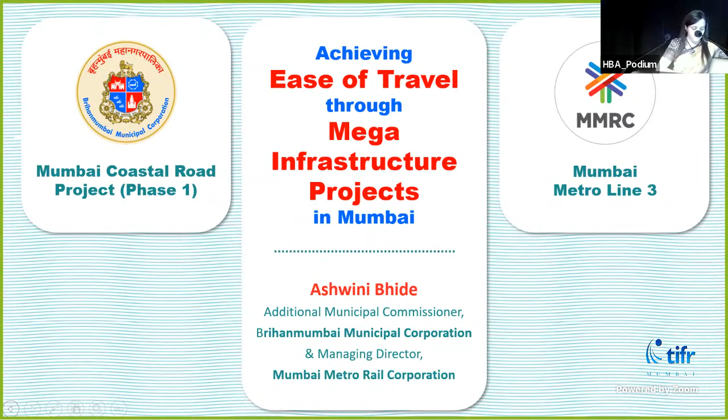I would start with Coastal Road and then give updates on Mumbai Metro Line 3. So this is the overall outline for today's presentation for Coastal Road: where exactly it is, why we need it, what its features are, how execution is being done, and when it's going to complete, because everybody is worried about that. When such huge mega projects are there, people think whether government has the capacity to really implement them and see them through till the end.

This whole project is called the Mumbai Coastal Road Project, but it is divided into two parts: the south phase, being implemented by Mumbai Municipal Corporation, and the north phase, being implemented by MSRDC, the Maharashtra State Road Development Corporation. I'll mainly talk about what exactly is happening here.

This is from the Princess Street flyover up to the southern end of Bandra Worli Sea Link. This is the overall scope of Coastal Road. It starts on Marine Drive at the Princess Street flyover, goes beneath Girgaon Chowpatty through a tunnel, comes out, then from Amarsons garden it moves like this. I'll explain how this is being built.

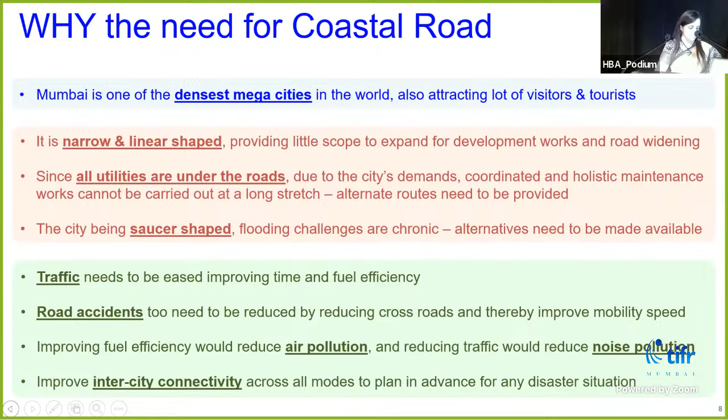So Coastal Road is a completely new road, not an expansion of the existing road network. Even elevated roads take the same right of way, so you don't find much difference in achieving additional connectivity, whereas the coastal road goes completely outside the city and still connects to important or critical locations in the city. That is the importance of coastal road.

What exactly is coastal road going to achieve? If you look at only this line, this is a 10-kilometer long coastal road. Not much in terms of length, but it is going to save almost 70% of your commuting time, because today reaching from Marine Drive to Worli takes almost 45 to 50 minutes.

On this road, you can travel in 8 to 10 minutes, achieving an average speed of 80 km per hour, compared to the abysmal current speed of 21 kilometers per hour. It will relieve traffic on the existing road network substantially, and there would be dedicated bus lanes available.

If equally efficient public transport is also available there, there will be substantial savings in fuel consumption, and of course in CO2 release per annum. Improved connectivity between southern and northern parts of Mumbai will provide better accessibility.

Today, South Mumbai has all the heritage areas and so many other centers where people would love to come, but they can't because of the travel time or commuting time it takes. So the coastal road would ease that commuting.

It will also have additional features, because since we are building this road on reclaimed land, that reclaimed land gives us an opportunity to have a garden worth 70 hectares wide. It is basically like having 13 Wankhede stadiums in the enclosed vicinity.

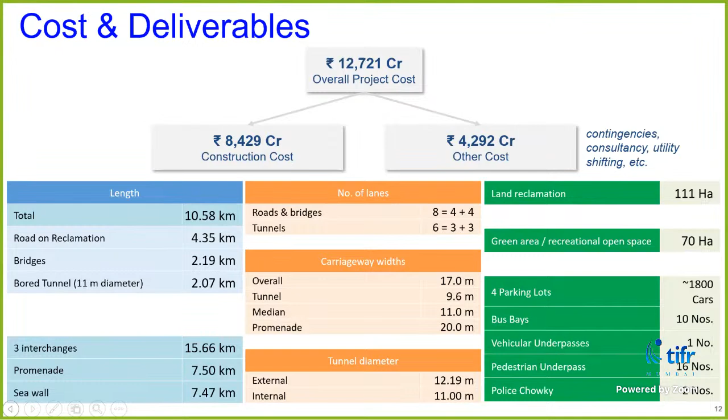This will be a road of 4 into 4 lanes, so an 8-lane road. In the tunnels, there will be six lanes. Overall carriageway width is 17 meters, which is very wide, with the tunnel being 9.6 meters wide. The median is also 11 meters, so all these areas would provide us spaces for more green areas.

And there would be a promenade of 20 meters. Apart from the promenade we have today at Marine Drive and some promenade at Worli, this is going to give us a continuous promenade of 8 kilometers from Priyadarshini Park up to Bandra Worli Sea Link.

Apart from what we have, the existing Worli promenade will also remain as it is, and we have Marine Drive intact. In addition, this will be a 20-meter wide promenade, giving us a lot of opportunities to create open spaces for people, with green features, cycle tracks, and so many other facilities.

So it gives us 70 hectares of such virgin land, which we can plan the way we want for giving additional green space to the city. The external tunnel diameter is 12.19 meters, and the internal is 11 meters.

For this project, we had to reclaim almost 111 hectares of land. Out of that, 40 hectares would be used purely for the road. The remaining 70 hectares had to be reclaimed because you can't have an exact parallel road to the existing road due to the contours.

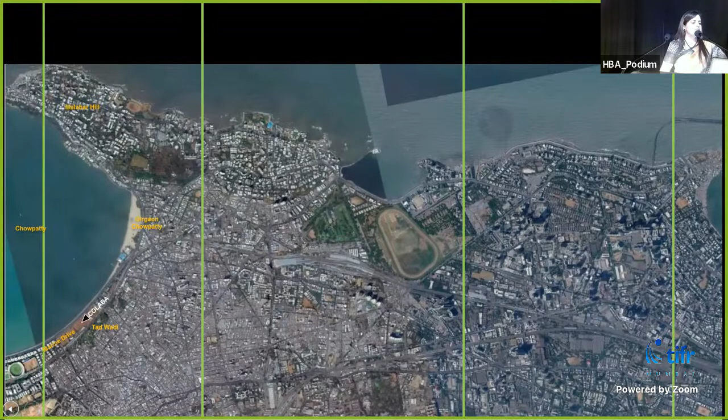Starting from the south side, from Priyadarshini Park - this is package 4, we call it. It is 4.5 kilometers long, from Princess Street flyover to Priyadarshini Park. It has a tunnel, some cut and cover portion, because when the TBM comes out, we have to slowly bring it on ground. For that, some portion becomes cut and cover, and then there is a ramp.

And then the tunnel has ground access. The second package is Priyadarshini Park to Baroda Palace, about 3.80 kilometers long. This is a complete road on reclamation, with bridges and interchanges. Package 2 is 2.71 kilometers long, from Baroda Palace to the Worli end of Bandra Worli Sea Link. This is also a full road on reclamation, with bridges.

These packages are being implemented by different agencies. 2 packages are with L&T, assisted by 2 project management consultants - Yooshin Engineering for package 4, Louis Berger for package 1. Package 2 is with HCC, HDC JV, Hindustan Construction Company, and the project management consultants are Egis India and their partners from UK. On top of it, we have a general consultant, AECOM Asia, because it's a very complex project.

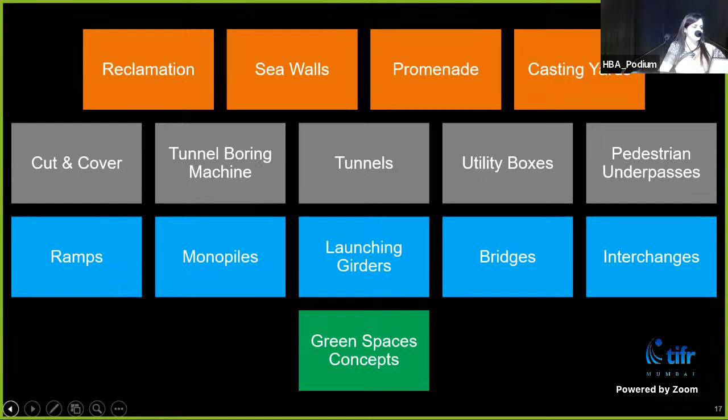So these are various features of this project, and how the future green spaces are going to look like. That is just a thematic presentation, but what we are going to make will be quite closer to that. So this is just a pictorial presentation - there will be a few slides on presentations only.

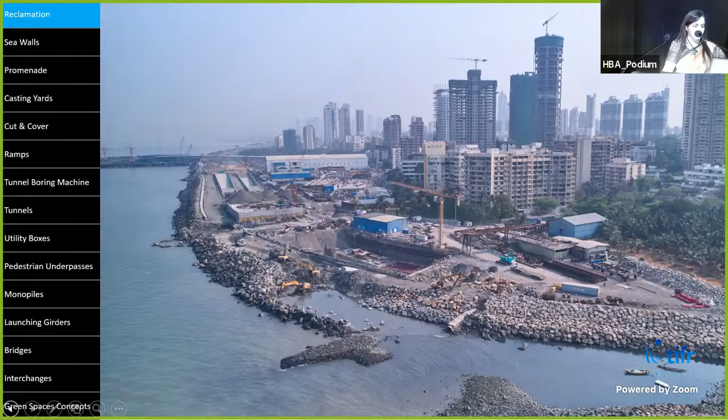This is near Nepean Sea Road. Here you can see this is behind, I think this is also Nepean Sea Road. This is towards Bandra Worli sea link, parallel to our Worli sea face.

So this is how the sea wall is constructed, because this is a very important feature, as I said. This protects not only the coastal road but the entire coastline. And it is done in such a way that the marine life is not only saved, but it can thrive because of the material being used.

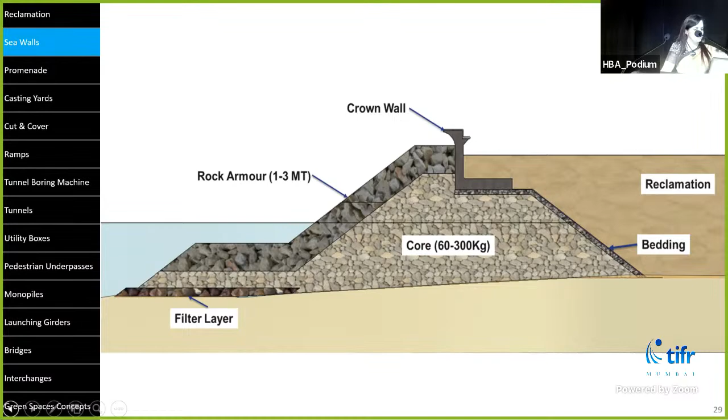So we have these different layers of different types of materials: the filter layer, then the core, then rock armor. This armor rock is very important. It is produced from certain quarries, needs to be shaped in a particular way, and is transported here, then laid in a particular way, and on top of it we have the crown wall. So this is how the sea wall is constructed for the entire coastline.

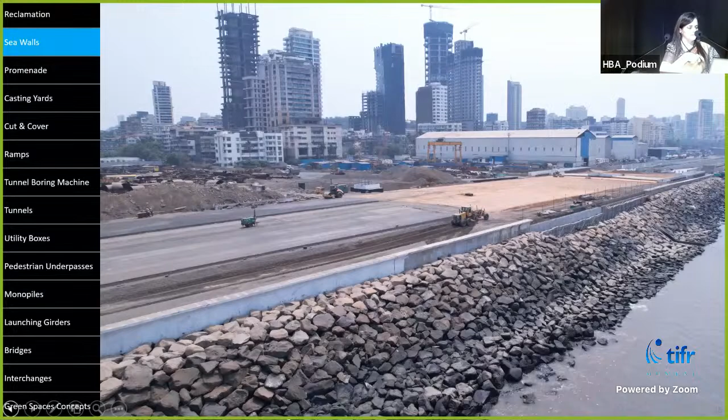So after the sea wall, there will be the promenade, and beyond that there will be the road or interchange portion. This is how the sea wall is constructed, and here you can see the crown wall.

Now this is on Marine Drive. Marine Drive has about a 1 kilometer stretch where we come out of the tunnel and the actual access road to the tunnel starts. There we have to use the existing promenade of Marine Drive that gets converted into road. Beyond that, the new promenade for 1 kilometer is being constructed.

It is like on stilts, but for people there won't be much difference. It will be at the same level, constructed in the same manner, and the continuity will be maintained.

These are casting yards. Now the advantage of this project versus what we faced in Metro is, in Metro there was so much requirement of land but we were not able to get it. But an advantage we had for this project is that we reclaimed so much land that some of it could be used for construction activity.

So whatever casting yards and RMC plants were required for this project - in Metro Line 3 they were all outside the city, and from there we had to transport everything and plan the sequence to fit into our timeline. But here that advantage was there.

So on much of this reclaimed land, we have either casting yards or concrete plants. The segments are needed for lining of the tunnel, and some of these girders are required for interchange bridges. So everything was cast, constructed and produced here.

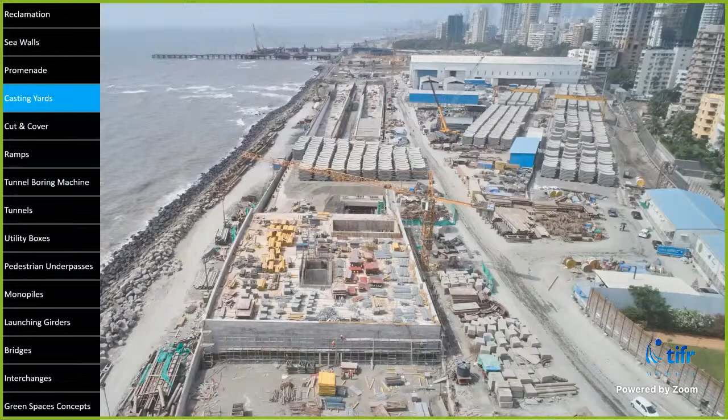So this is how we work in the casting yards. There are different molds, and the advantage is because it is within your reach, inspection could happen on time. The concrete is also prepared and made there, so the consistency of concrete could be easily monitored. All this was possible because we had land in the vicinity due to this reclamation. So this is again the casting yard.

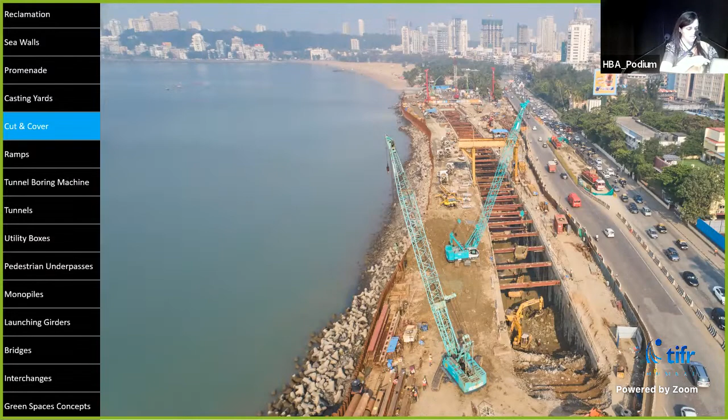This is the launching shaft site from where the machine was. In fact, in this project, we launched the machine from Priyadarshini Park side, and then it was brought here - that was the whole idea. Once it comes here, this was a retrieval shaft. Take out the machine, go back to Priyadarshini Park, and then again start tunneling for the other tunnel.

But instead, our contractors, consultants, and team used a different methodology. They used a turntable - this is a huge machine, as I told you. They turned the machine here and started tunneling from this side, so we didn't have to take out the machine. Now the machine will come up only at Priyadarshini Park, which is just 100 meters away now, so maybe in another month's time we'll finish our tunneling.

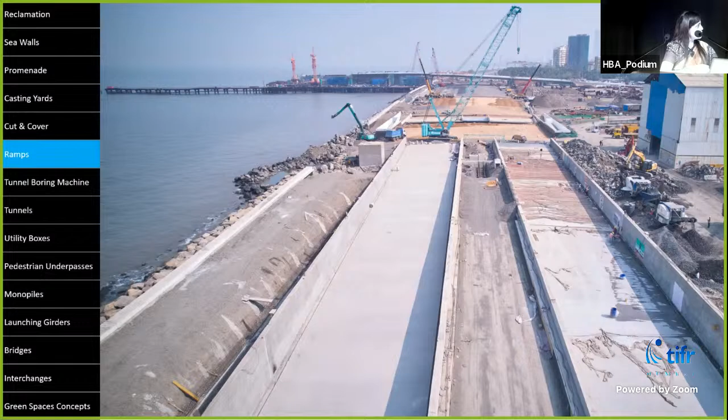So this is how the working happens. This is a cut and cover section - this is the actual completed cut and cover section. You can see, towards Priyadarshini Park side, the one tunnel which is completed. These are the ramps, you can see the slope here, so slowly the vehicle starts coming up and merges with the normal level of the road.

So this is about tunneling. This is the tunnel boring machine. In Metro 3, we had 17 tunnel boring machines, but of smaller size - the diameter was 5.6 meters. Here it is more than 12 meters. And this is the cutter head, which was lowered in the Priyadarshini Park launch shaft.

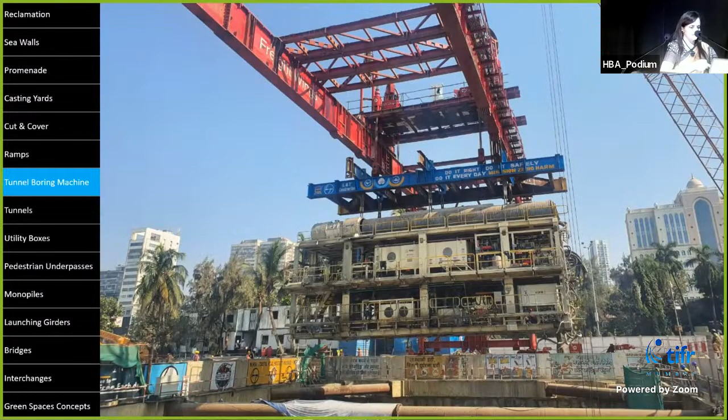So you can see the size and magnitude of this project from these pictures. This is the machine, titled as Mavla. So this is the whole machine - it has already gone inside.

These are the front shields, and then we have many gantries behind which feed the machine with concrete segments, take out the muck, give ventilation, and supply many other things required for construction. This was our breakthrough when we got the machine out for the first tunnel, and then it was shifted here and the second tunnel was started.

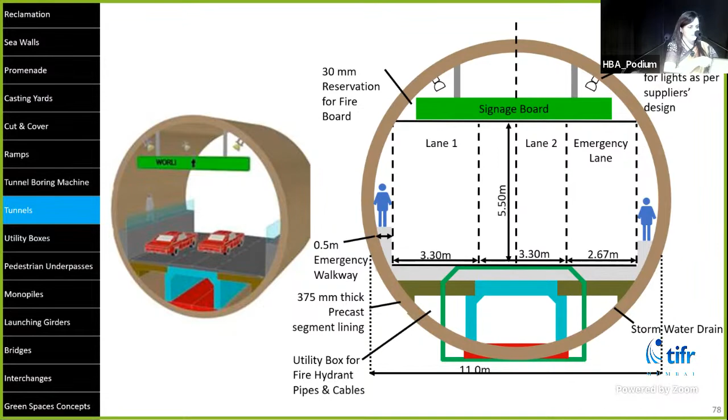So this is a completed tunnel. This is the utility box.

Then we also have to do these pedestrian underpasses - that construction is going on. Once they are completed, that area will also be filled and the road will be constructed on top of it.

Then there are many stormwater drain boxes also, because you have to cross everything. Right now they are terminating at today's coastline, but we are extending the coastline - we have filled the area ahead of that. So those stormwater drains need to be taken out towards the sea beneath the road, and that needs to be planned right now because later on we won't get a chance to do that.

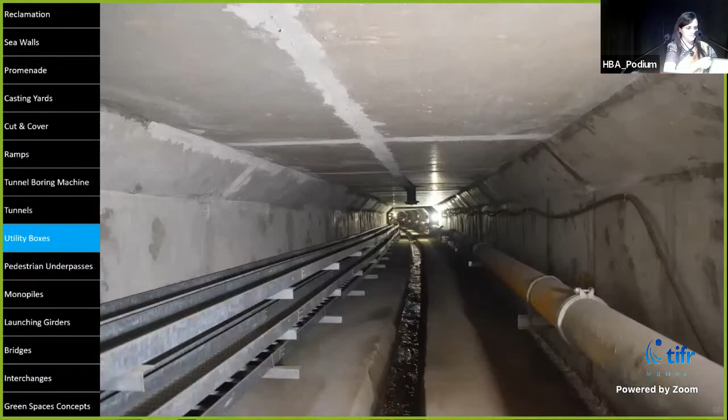So here you can see for Haji Ali, we need a pedestrian underpass because there's going to be a level difference in this area. This underpass will take people from the main road to Haji Ali Dargah. Apart from the road, there will be a lot of green spaces here, so people can walk from here up to Mahalakshmi Temple and access it from the back. Today that access is quite complicated from the other side.

So these are the RCD machines for monopile construction. This is how the monopiles are done.

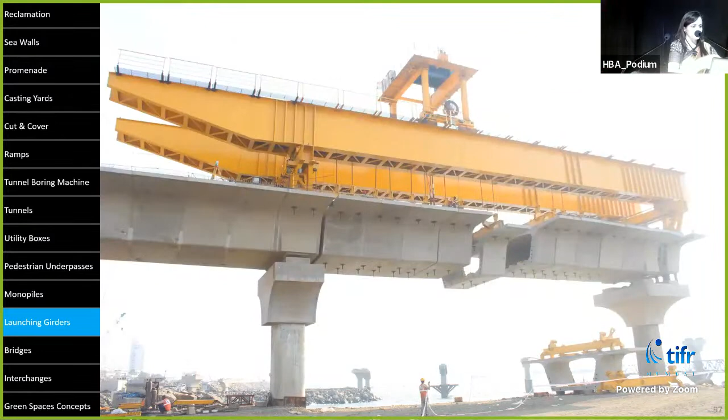This is how the bridge portion is constructed. We have these pillars on monopiles, and these are all temporary structures. This launching gantry brings segments from here, but some of the spans will be constructed in situ, which requires a lot of support. So temporary structures are erected, and with the help of that, the bridge is constructed.

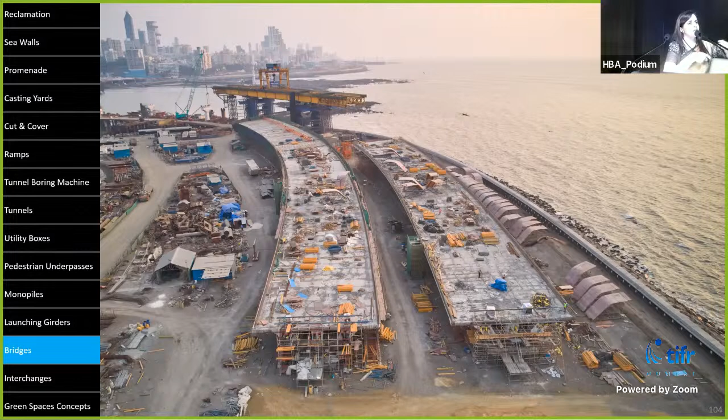Now this is the interchange I had shown, with different arms. At Haji Ali, we have an 8-arm interchange, so you can go in different directions, similar to what you see in foreign countries. These different arms are under construction. At Worli, there is a 6-arm interchange, and at Amarsons Garden, there is a 4-arm interchange. So people can go in multiple directions and even take a reverse direction.

This is Love Grove Nala at Worli, opposite Atria Mall. Here we have to give space because some BMC sanitation activity happens here. There's a treatment plant, and water flows from here, so we have to give adequate space while maintaining continuity.

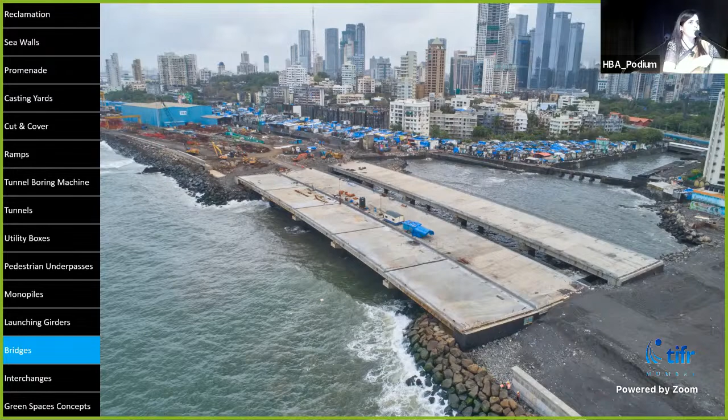So we have these bridges, but initially the promenade was not planned here. The promenade was getting cut, so people had to walk all the way to Worli to reach it. Later, the promenade was added here and constructed, and now it is complete. So there are two right of ways for the road, and this is the promenade part where pedestrians can access and go. This is how it looks, and now this portion is clear.

Water flow is intact. When we were constructing it last monsoon and before that, some filling was required to be done here, but during monsoon we had to remove it temporarily to allow the water flow to continue, and post-monsoon we could complete these sections.

So this is towards Bandra Worli Sea Link, because this is the main bridge. It is in the open sea, and that's why it has certain specific requirements. There are design challenges, and this is under construction right now.

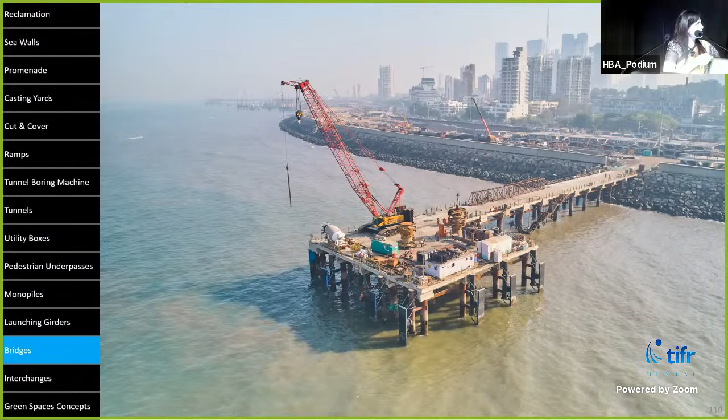This is part of the interchange at Worli. This is one arm, and then it will go circular, taking a circular turn here. So this is how that interchange is shaping up.

Here the work is happening because finally they have to connect up to the bridge portion. Right now one foundation is done, but then this machine will move further and the next foundations will be made. So key interchanges are also a very important feature of this project.

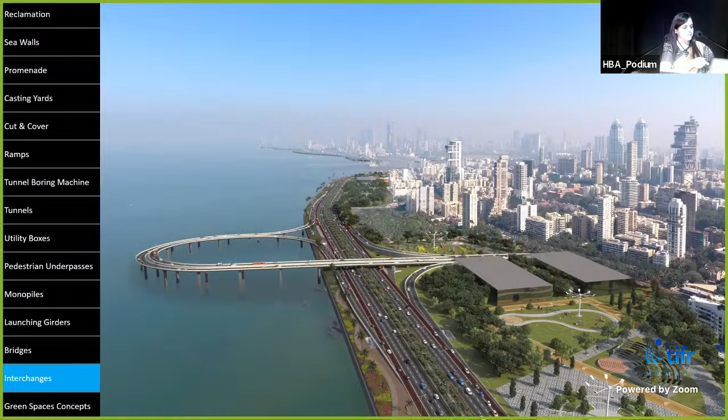So it would ultimately look like this. This is towards Worli, this is Amarsons, and this is Haji Ali, and that is what is under construction right now.

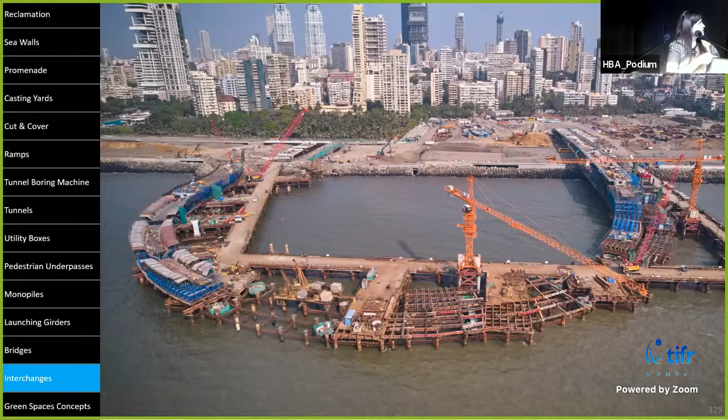So this is Haji Ali. You can see the main bridge, and the whole interchange is shaping up here. You can see how this part of the interchange is being constructed, and we can very well see all these interchange arms coming up and progressing daily if you travel near Haji Ali or Worli.

So this is the temporary staging, because the casting is happening in situ. Some of them are precast segments which are brought and installed, but just to expedite the whole work, the contractor has adopted a mixture of methodology—some in situ castings and some precast structures.

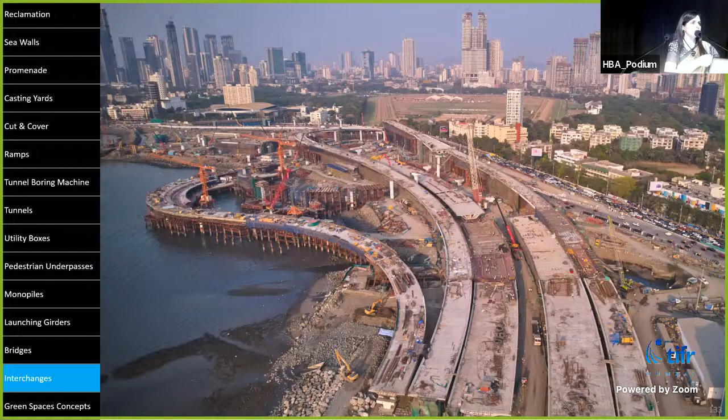So here you can see how the interchange is coming up. This also gives you a fair idea of how it is coming up.

Basically this interchange will let people come down and go in different directions. They can go back and take the existing adjacent route. But those who want to go ahead, this bridge will be there, giving connectivity so they can continue traveling on the coastal road.

Now, this is a huge construction activity. How did we do that? What kind of rigor did we have to follow? There were many rigorous studies and efforts. Multiple studies were taken up before the project went from drawing board to actual ground - some before the project started, some while work was ongoing. Then there were multiple approvals and no-objections required from different authorities.

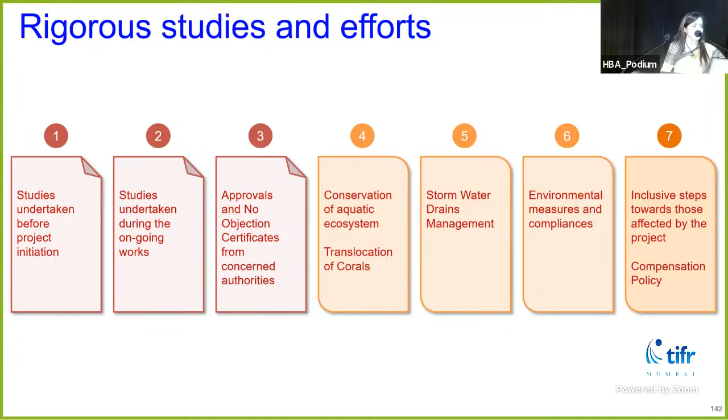These were the different studies we carried out: inception report, feasibility report, then detailed project report containing almost 11 chapters. We also had to study extreme waves, extreme water levels, storm surge, tsunami height, and coastal morphology for the coastal road project, conducted by the National Institute of Oceanography, Goa.

Sometimes people feel that while we are doing this project, maybe it isn't being done in a safe way, and wonder whether it will create additional problems for the city. But no, all these projects are planned in a very meticulous way. A lot of discipline is followed before we actually start executing these projects, which is why various studies are undertaken. Even during construction, if a problem is faced or anticipated, those studies are undertaken and the issue is logically concluded before we move ahead.

Studies were also undertaken during ongoing works - there was a study by the Central Marine Fisheries Research Institute, which was basically a baseline study of the impact of the coastal road on fisheries, fishermen, and their livelihood. NIO also undertook a Marine Biodiversity Conservation Plan for the Mumbai Coastal Road, covering various impacts of the coastal road on waves, water levels, etc.

In the initial study, we had not found any coral colonies in the vicinity. But when we actually started working, we found them. So we had to undertake a coral translocation report. NIO was involved and gave us a plan, and in a very systematic way, the corals were translocated to another place where they are thriving now. But it had to be done very systematically.

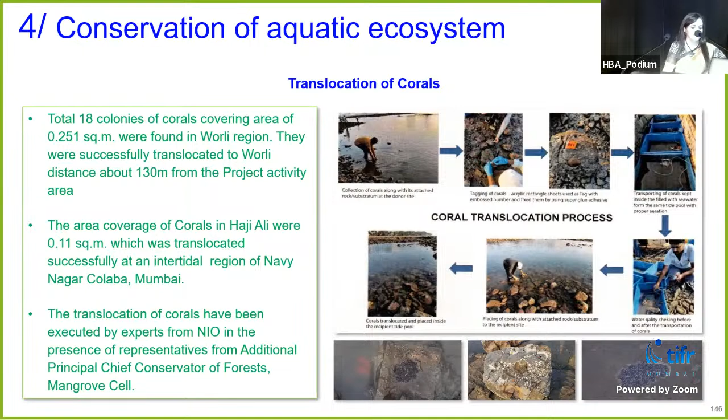Then stormwater drains, because that was another worry. We used to get a lot of complaints that because of the coastal road, flooding has occurred — you could see newspaper headlines also. But it's not like that, because everything has been studied. Whatever water channels today are throwing water out of the city, those water channels are not only kept intact, but actually their capacity is augmented to suit the BRIMSTOWAD report or whatever BMC is following as per future requirement.

So originally there were 7 box drains, 3 pipe drains, 11 open channels. All these existing SWD outlets were clogged in fact, because of tetrapods at some locations and other facilities. But now, when we had an opportunity to reconstruct them, we have done it in such a way that they are not clogged, but actually could be used in a more efficient way. So all SWD outlets are now opened clearly. These outlets are extended independently beneath the road up to the sea along the alignment and through box culverts, most places, and their capacity is augmented, with well-designed hydraulically operated sluice gates.

In fact, today only we commissioned 1 sluice gate in package 1. So these things are happening, and this is how it was planned, and it is exactly implemented the way it has been planned. Then there were some other environmental issues.

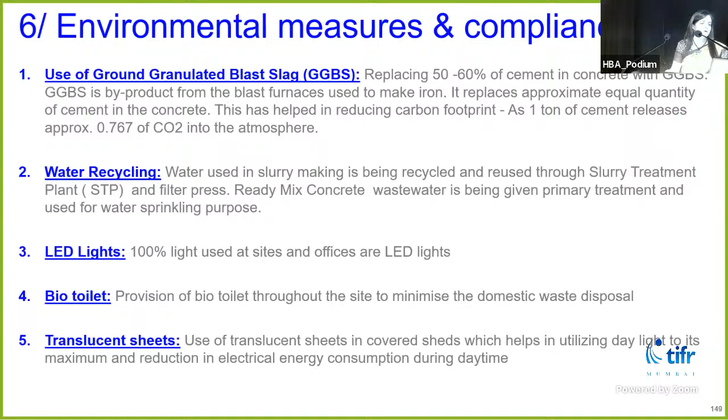Then every activity, like all the RMC plants, casting yards, grout plants — they are covered, so you don't even realize that this much activity is going on inside. Mist fogging machines are used to settle the dust. There are a lot of digital initiatives. Noise barriers are placed wherever required, wherever the buildings are closer. Even during segment casting, noise enclosures are put up. Marine biodiversity is maintained, environmental monitoring is very carefully done, and so many other structural features are used to ensure that environment is conserved and protected.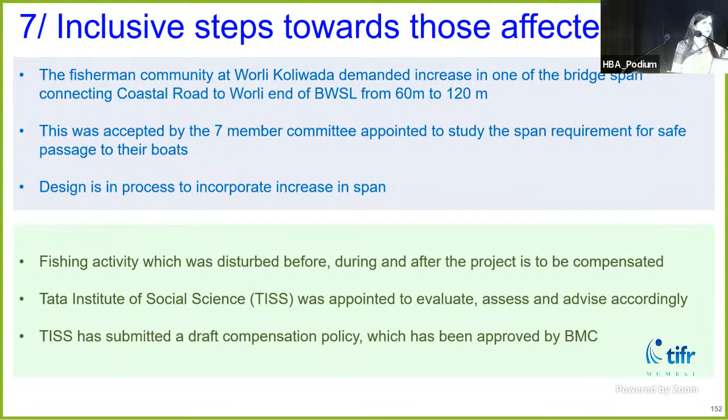This is one slide about the social aspect of this project. The fishermen felt that during construction their livelihood was getting impacted, and after construction too, they felt the 3 spans of 60 meters given near their Worli Koliwada, from where their boats go for fishing, were not adequate. As per our calculation and all professional agencies' calculations, looking at the size of their boats, these spans were of adequate size. Nevertheless, they had the perception that since it's an open sea, if wind activity is more, the boats might get disturbed by the pillars.

So finally the government engaged in a lot of deliberation. We tried to convince them, but when it didn't work out, the government took a decision to enhance that span from 60 meters to 120 meters. This was an accommodative and inclusive way of construction. In addition, we appointed Tata Institute of Social Sciences to calculate how much compensation for loss they will need during and after construction. That report has been accepted, and soon we will be putting their compensation amount into their bank accounts. This is how a socially sensitive approach is adopted to implement these kinds of projects.

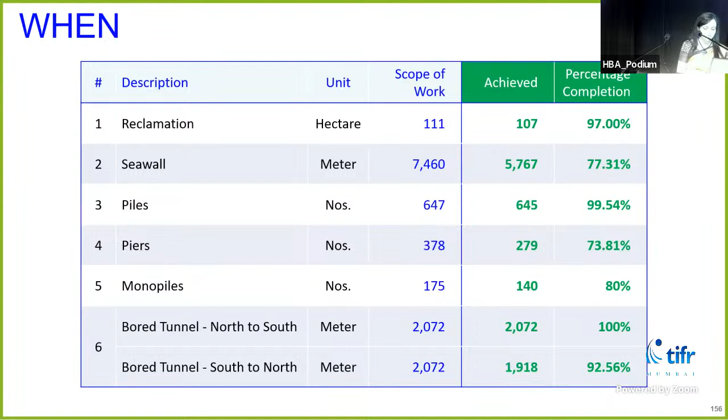This is the original scheduled completion, November 2023. Physical work done so far is 72.14%, financial progress is 66%, and tunnel boring is 3.99 kilometers achieved. All these works are in progress, and we are trying our best to complete this project by end of this year, except for the connectivity to Bandra-Worli sea link, where the span change decision has recently happened. That part will take only 6 months ahead of the existing timeline.

But this project, despite COVID, despite all litigations, despite stay orders issued by court orders, we have salvaged, and in a very reasonable time a lot of work has happened. We are all geared up to complete it on time and make it available to Mumbaikars in the near future. So this is all about Coastal Road. I thought this would be of interest to you. This is a complex engineering project, but its complexities are different, unlike the ones in Metro 3 project. I will take a pause here as far as Coastal Road is concerned.

And if everybody is okay, I'll update you on what is happening on Mumbai Metro Line 3, because a detailed presentation was given 4 years back and the issues were discussed. I'll give a quick overview of what it was, and now mainly a pictorial presentation of where exactly the project is today.

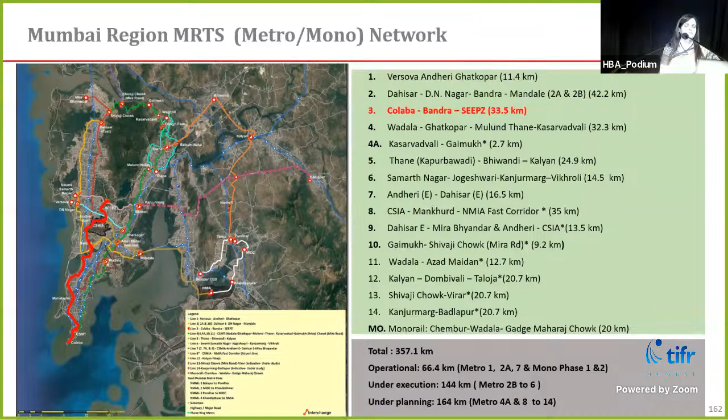Now, Metro Line 3, some of you must be recollecting, is a 33.5 kilometer long, fully underground corridor with 27 stations, 26 underground and 1 depot station at grade. The original completion cost as of 2011 was 23,136 crores, but that cost has now enhanced to almost 37,000 crores, and additional loan is being negotiated with JICA for that.

The economic IRR, because these projects are not financially viable if you look at financial IRR, but if you look at the overall benefit to the economy, they are very high, at 17.93%. With the revised DPR and latest fare structure, our financial IRR also improved to 4.20%. Our plan is to commission phase 1 from Aarey to BKC this December, and BKC to Colaba in June 24. So there is a delay of about 2.5 years. Originally we were to commission it in 2021, but many things happened, including COVID. Still, it is not far away, it is very much in our reach.

Once commissioned, it will start with 13 lakh passengers per day. In 2031, the ridership will be 17 lakh passengers a day, one of the highest in India. By 2055, when everything, all trains would come, it will be 31 lakh per day.

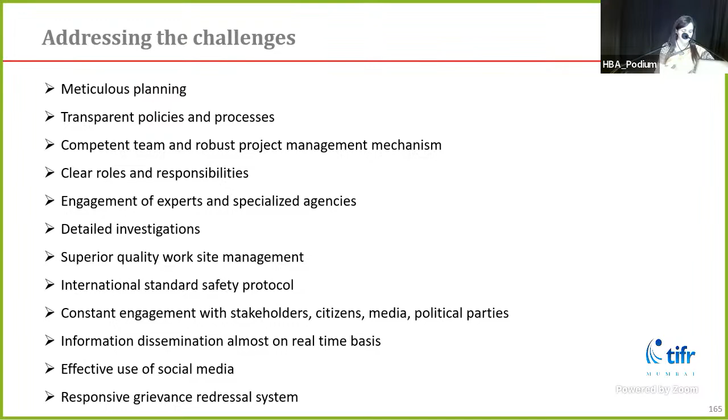So these were, and of course, very effective use of social media, continuous engagement with all the stakeholders, better coordination, proactiveness, anticipation of problems and resolving them in advance. All those things were tried.

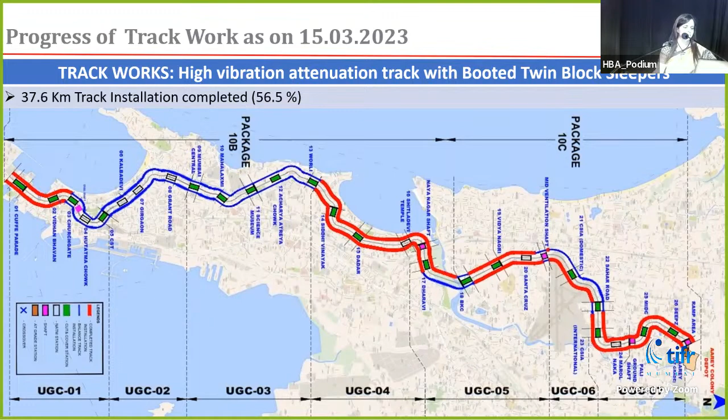This is a much more complex project than the coastal road project, though it looks big because it's a road project. So there is no interconnection or mixing of other systems.

If the civil work is not complete, the system work can't happen. Unless the MEP works are done, the other system contractors can't work. So we have used this 3D BIM technology very extensively so that the designing happens in advance in a proper way, clash detection and everything is solved before we actually start work on the ground. So all those project management strategies and mechanisms were effectively used.

So depot is now progressing. And I'll just flag this issue that, on the request of Western Naval Command, we intend to extend this line up to Navy Nagar. This will be roughly 1.5 to 1.8 kilometer corridor.

This is our Cuffe Parade station. From here it will be underground, and our station will be here just before the TIFR campus starts. These are the 3-4 stabling lines. This way, this area also gets connected and people get proper connectivity through a very decent rail-based public transport network. This is also a strategic connectivity for very important installations like TIFR and the naval base.

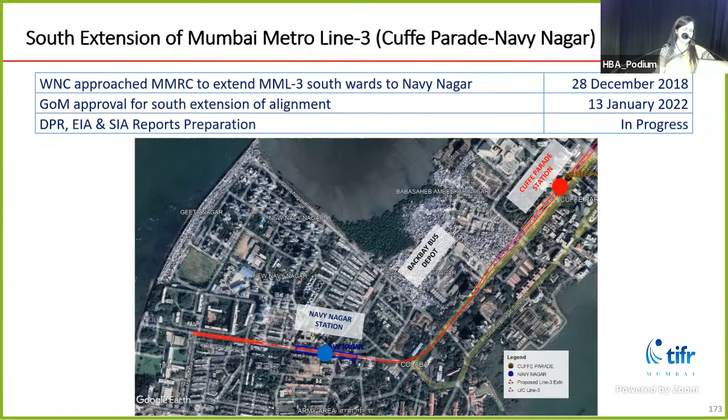This request came to us in 2018, but a lot of deliberations happened on whether it is really required, and how we can carry out the work in such sensitive areas. Finally, Government of Maharashtra approved it in January 2022. Now we have appointed RITES as our consultant. DPR preparation, environmental impact assessment, SIA, everything is under preparation. All stakeholder discussion is also happening. After that, the alignment will be fully finalized after taking into account everybody's concerns, and then we will move for approvals and funding arrangement and other things.

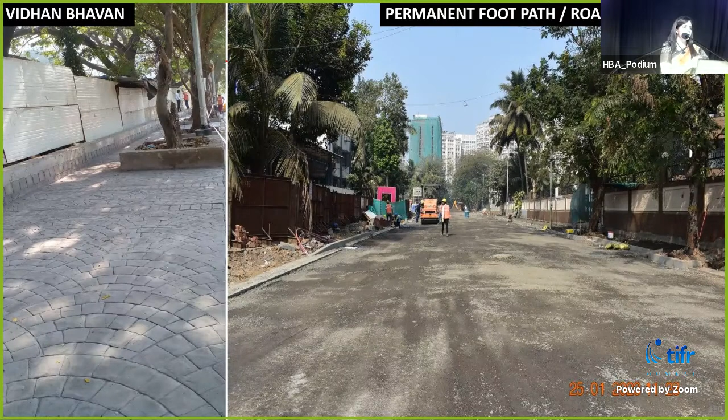So some of the roads which we had closed, we are giving them back. We are reinstating those roads. So this is one such road.

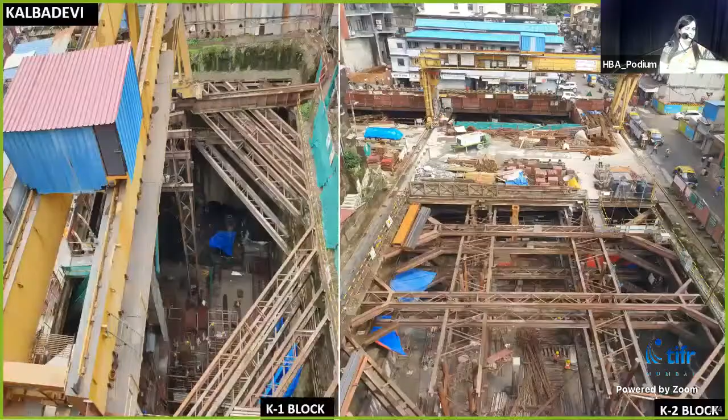These are, I can say, nightmares only - Girgaon, Kalbadevi and Grant Road. The way we are constructing the station, these are big case studies, because a station length is normally 250 meters, width roughly 25 meters. We need that kind of station box, and we got it in places like Cuffe Parade. But in Girgaon and Kalwadevi, we got only 2 small boxes to go inside.

Going inside, the tunnel happened because the TBM passed through beneath the buildings. But then we had to connect these 2 tunnels and create a platform. For that, we can't cut open the ground and excavate from the top, so we just had 2 small shafts, went inside and started tunneling horizontally. But we had to do that without disturbing any of the buildings above ground, and this was a big challenge.

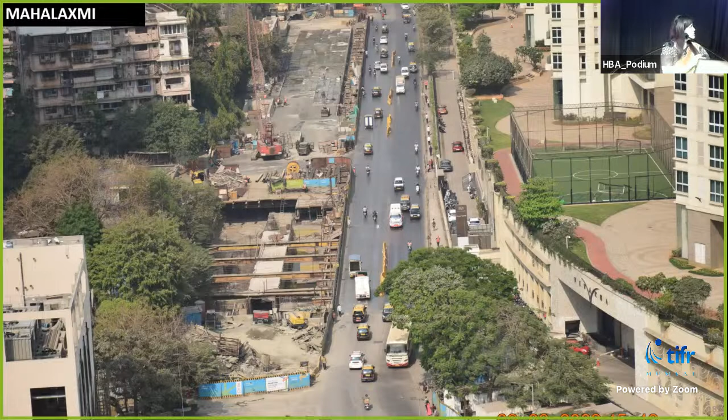This is BKC, almost double the size of a normal station. Here also the station box is all completed, finishing works are happening, and now we are trying to reinstate the road. This is the BKC amenity building.

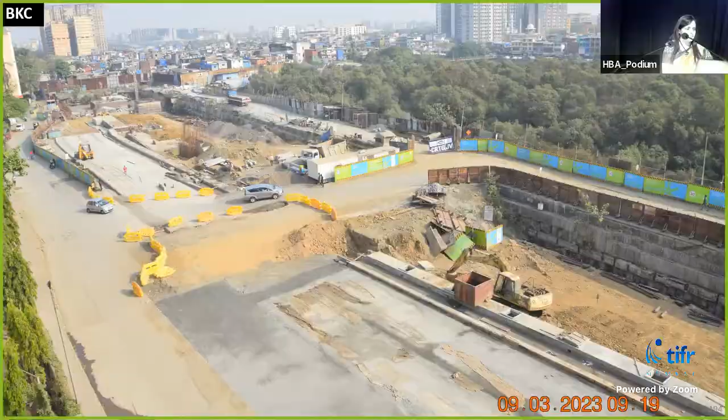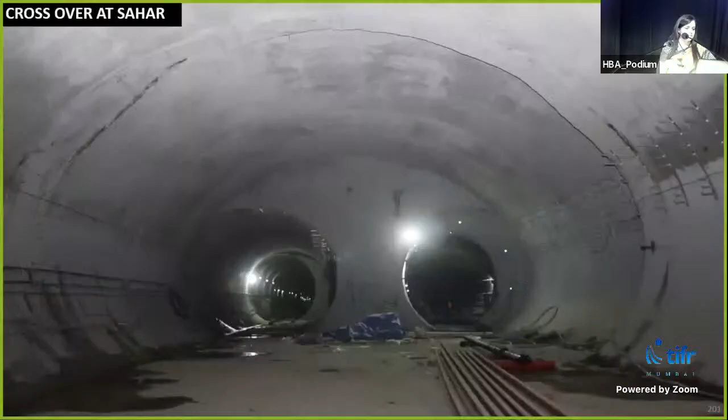This is a crossover where trains could turn, like at Sahar. Because every 10 kilometers we have a crossover, so trains starting from 5 to 10 kilometers away can take a turn. If sometimes we have to have shorter runs, or there is a disturbance on the line ahead, then the trains should also take a U-turn. So for that we have to have this crossover.

Here the train tracks will cross so that the train can take a U-turn, otherwise every time it will have to come to the terminal station. So to avoid that, this has been planned. There is a crossover at Sahar, at BKC, at Worli Acharya Atre Chowk, at CSMT Azad Maidan station, and at Cuffe Parade. So there are 5 different crossovers.

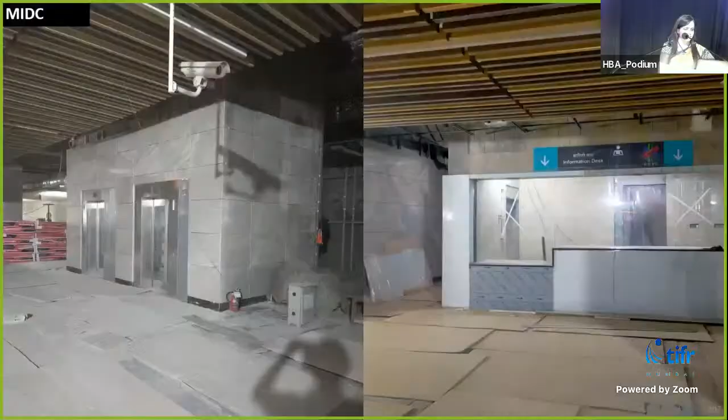So this is MIDC. These are platform screen doors, which I was mentioning, so the tunnel is not visible that way. It is very, very safe. These are lifts and information desks.

And this is what we are doing lately, after the government vacated the stay. In the last 4 or 5 months, after re-engaging the same contractor, which we had to follow that process, work was stopped for 2.5 to 3 years. So now after starting again, we could finish a lot of things here. There are almost 900 laborers working there, and it is being monitored daily.

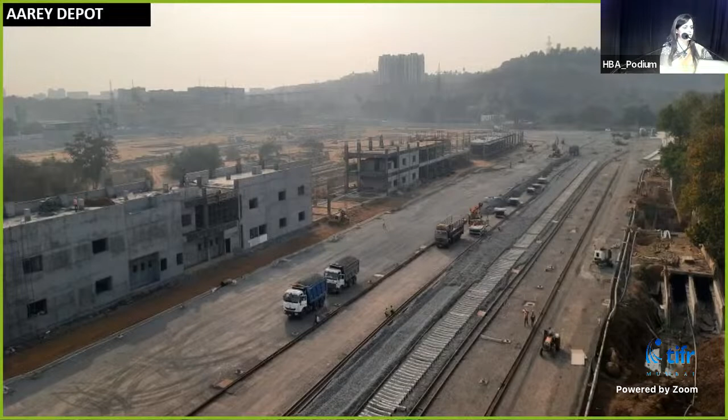So the depot work is also happening very fast, and we have to use this depot for our stage 1 commissioning, so we are using it in a phased manner. The depot has an operation control center, but that may not be ready for stage 1 commissioning, so we have a backup center at BKC station which we will use.

What else is required for the phase 1 commissioning to be ready in the depot? That change in planning also we had to do. So what exactly does the metro do?

Since MMRDA's two corridors are fully commissioned, like Metro Line 2A from Dahisar to Andheri on the western side of the railway track, and Line 7, which is also Dahisar to Andheri but on the eastern side, parallel to the railway as well as Western Express Highway, they have fetched almost 105,000 passengers per day even in the initial phase. This itself shows the pent-up demand in the city and people's appreciation and aspiration for a better and more efficient public transport.

It has also visibly resulted in reduced traffic, though actual figures are not known yet—MMRDA will conduct that study after allowing this metro to operationalize for a few more months. But visibly the traffic has gone down on those roads, and the scenario is much better, improved on both New Link Road and SV Road, as well as Western Express Highway and the roads in between.

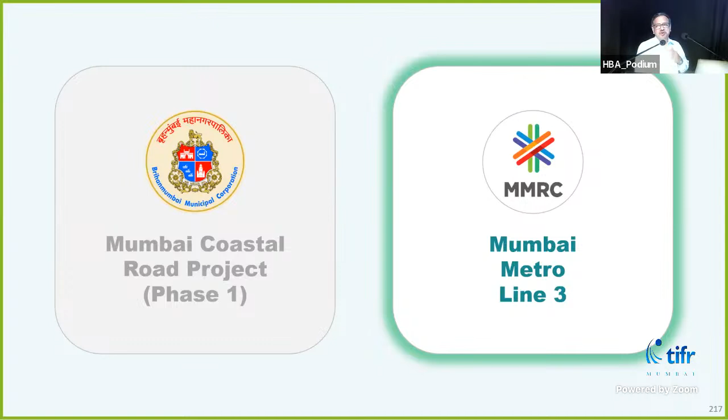Almost no words to say. Two major projects, amounting to about 50,000 crores. There's one person who has been spearheading this. She's stood up here talking for more than an hour and a half and pinned silence in the audience. It really tells you what we are really looking for.